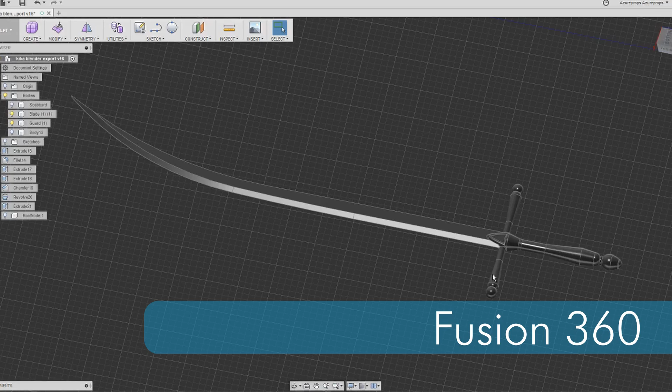As you're probably here with my latest project, Kika's blades from Suikoden IV. Because of the machined shapes and non-organic surfaces of the weapons, I decided to create them in Fusion 360.

The blade extends back into the handle for better balance and a more secure connection. After finishing the model, the next step is to export it for sizing.

I go to the Make tab, select 3D Print, while turning off the Send to 3D Print utility because it's not going directly to my printer. Then I save it as an STL file.

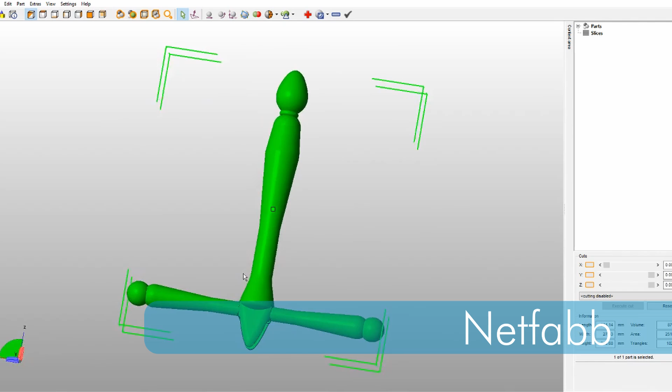Next up is Netfabb. Here, I can scale the models if necessary. Thankfully though, Fusion is used in real-world CAD applications, and it's easy to size in it. So here, I'll just be using Netfabb to break the model into parts.

I'm splitting the handle along the Y-axis, keeping in mind how this will allow it to print. I try to think about how the print lines will be oriented because that can affect strength, ease of cleanup, and assembly.

After that, I export each part as their own STL. We need to hop back into Fusion for a second.

Because of the thinness of the blade and the scabbard, I decided to try dovetail joints for the first time. These will help when I glue everything together and create a stronger connection compared to just two flat surfaces sticking together.

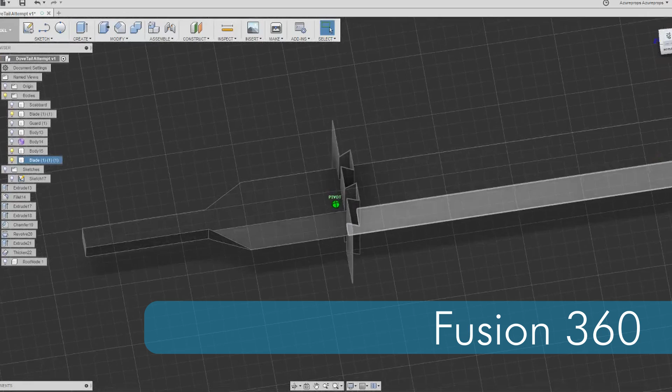I first tried using dovetail joints in the test version of Netfabb 2018 Pro, but that program is a bit outside my price range.

So I did some digging and found a wonderful tutorial, which I'll link below, that shows how to create dovetail joints using Fusion 360. It takes a bit more work, but I'm happy to know there is an alternative way. Back to my normal pipeline.

KISSlicer takes the model and breaks it down into layers based on how detailed I want the print. Thinner layers means more time and a sharper, smoother print. Thicker layers make for a shorter print time, but more cleanup.

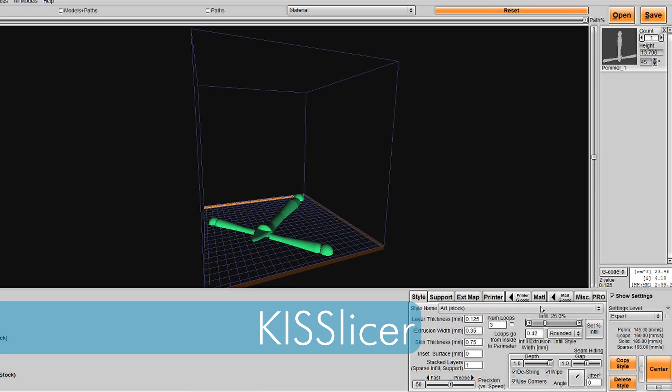My version of this program was customized by the makers of my printer, with several options for print variations. All of this info is then saved as a G-code, and it's off to the printer.

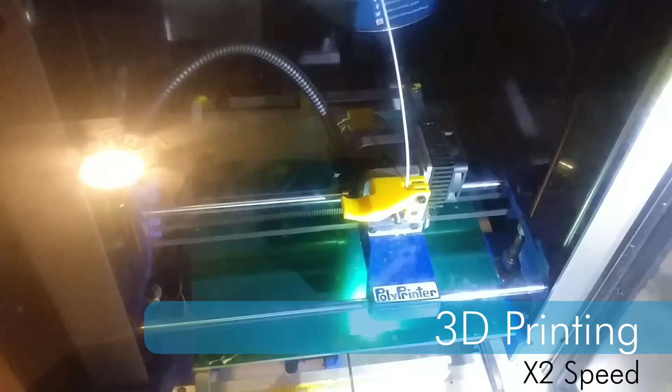I use a Polyprinter 229. It has a 9x9 heated bed, includes a webcam, and is fully enclosed.

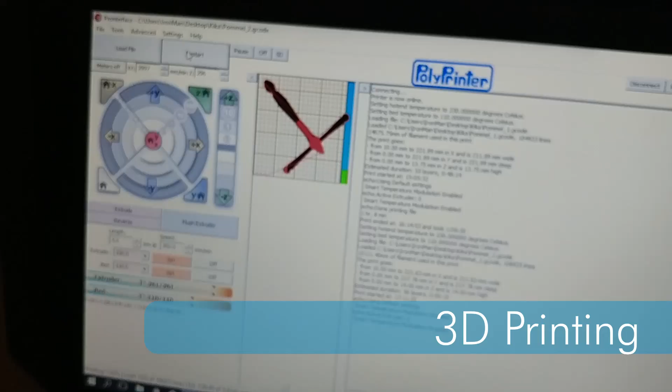The program my printer uses is called Polyprinter. This screen lets me know how hot the print bed and extruder are, gives its own estimation on how long the print is going to take, and keeps me updated on if anything goes wrong.

Before printing the full-sized version, I decided to print off a mini version to test with various scabbard designs. During this project, I learned that the scabbards of curved blades can often have an opening to allow the blade to slide in from the top as well as the front.

The main purpose of this test was to see how far inset the cut needed to be to allow the blade to slide in without bending.

My first time using dovetail joints was a success. Other than needing some cleanup, they fit together nicely and allow for the blade to be assembled without adhesives.

For the parts that did need some cleanup, I used a tiny set of sanding tools to get in between the joints. This 3-sided tool was great because it mimicked the shape of the keys.

To flatten the top, this hand sander was great. And to take off more area, I wrapped some of the sanding tools in low grit sandpaper.

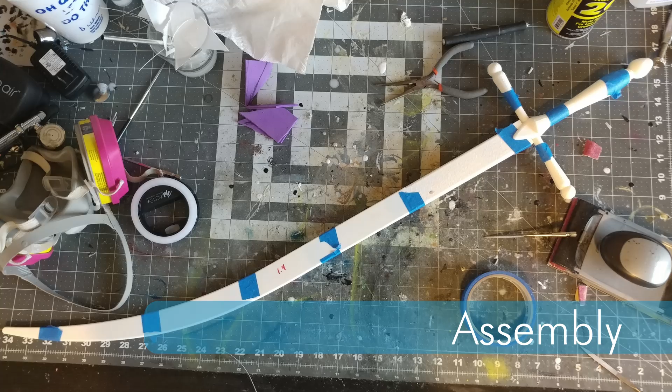I then assembled the whole thing, and other than the dovetail joints, it held together with some painter's tape. And that leaves the final test.

Overall, it works. I just need to widen the space in the scabbard to account for the lining I'm going to add, which will help protect the final paint job.

I'll fix the model, reprint it, then it's on to final assembly and sanding, which I'll cover in a future video. Thanks for watching!